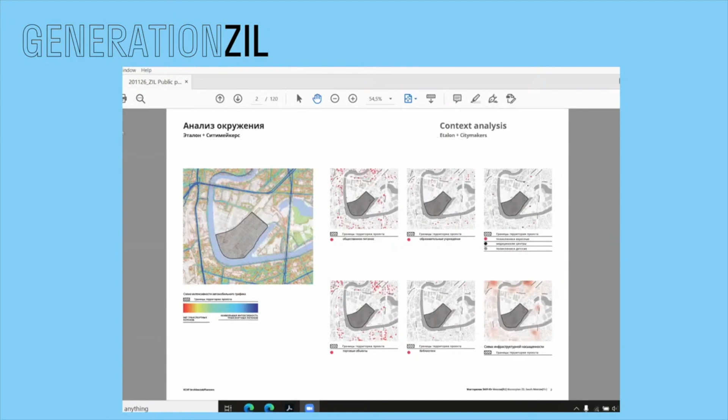Jana, may I ask you to put our second slide, please? In fact, the work we're going to talk about is the work of a developer.

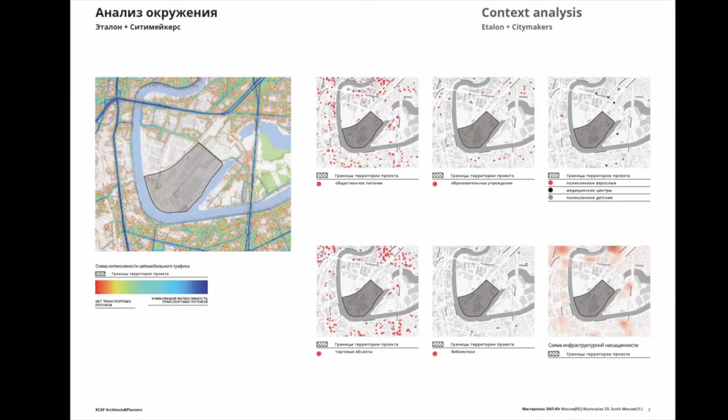Today I'm wearing two hats, not as a council member, but as a member of this large and diverse team. Before giving the floor to the colleagues from KCAP, I want to say that we paid special attention to the analysis of environment, urban planning restrictions, and the specifics of our site. We realized we need a complex approach to the environment, and that's the approach we're using currently. For us, it's really important.

We're very happy that the client is fully sharing our approach, and together with the project team, we are going to enhance it. In parallel, and sometimes even at the crossroads with each other, we continue working, analyzing not only the existing provisions but also regularly improving our vision of the site.

We're enhancing the master plan. This is the work headed by KCAP, and already now we're thinking about the landscape, social, cultural concept, the function of the ground floors, and all the matters regarding architecture and development. Above the first line of construction, we already had an architectural council, and we are taking into account transportation, logistics, and entertainment as well.

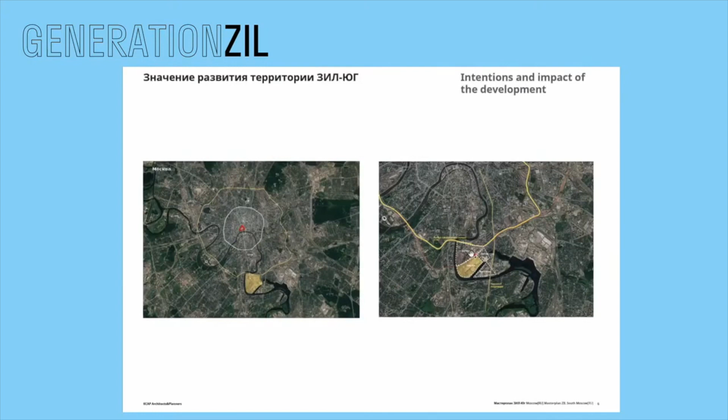For these two stages that we developed together with the colleagues, we developed a lot, and we will give you the summary of the project and the strategy of the master plan. It's wonderful that Etalon didn't just take the site and start building, but they saw the huge potential of this site, so they decided to interpret and improve it with experts.

This will be a house for 25,000 future inhabitants.

For ZIL South, first of all, we needed to improve the flexible spatial structure framework to integrate it into the city fiber, and within the framework of this city fiber, we develop concepts that will help every site.

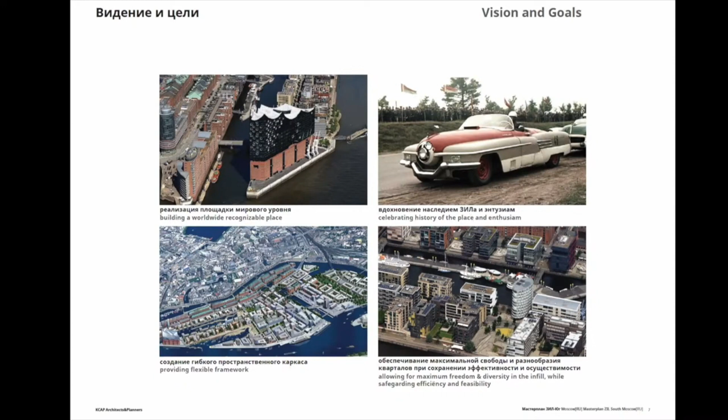At the same time, we want to create a dynamic, innovative neighborhood. We suggest a safe and convenient design that is human-centric, that promotes human connections. We want to create an active, 24/7 neighborhood that will give a threshold for further growth and improvement of quality of the surrounding territories.

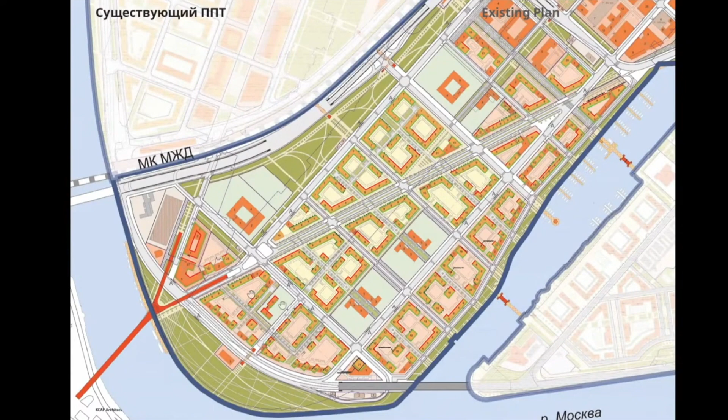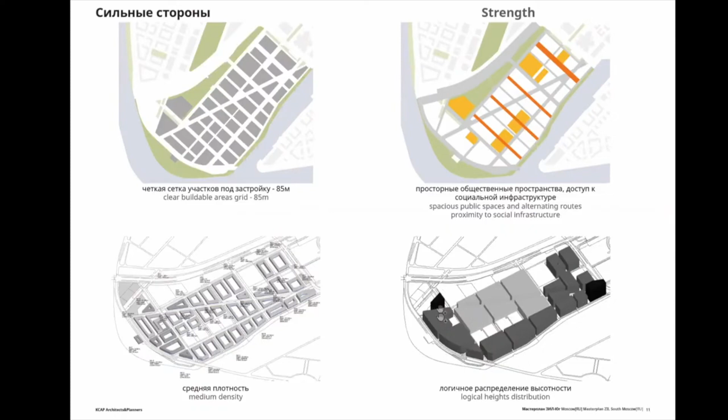A few years ago, the suggestions on the territorial planning were presented. They laid the foundations for our master plan. We analyzed this document and found the strengths: 85 meters, social infrastructure, average density in the neighborhood, and also the density increasing closer to the riverbank and metro station.

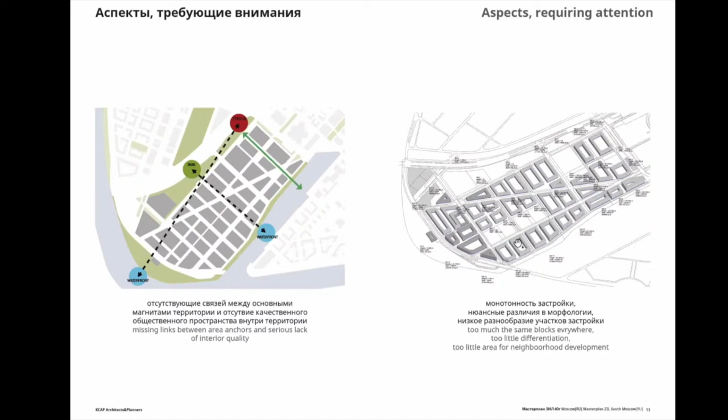There are weaknesses too: connections with the surrounding area mainly via tunnels and no on-ground passages, traffic-heavy roads adjacent to the site, absence of magnetic areas in the territory, and the absence of quality space within the territory. The territory was monotonous and lacked big cultural functional magnets.

To enrich the city fiber and make this project strong, we suggest two interventions. First, to make a central park. It will not only connect ZIL to the embankment in the eastern part and connect it to the metro, it will create a special space inside the urban structure.

Second is a pedestrian boulevard. It will connect ZIL metro station and ZIL East on the riverbank. This boulevard will become an attractive route surrounded by a series of small squares, creating a friendly pedestrian axis that connects the entire social infrastructure.

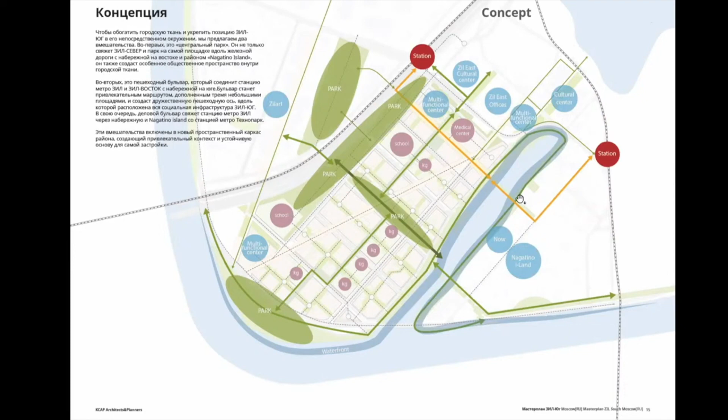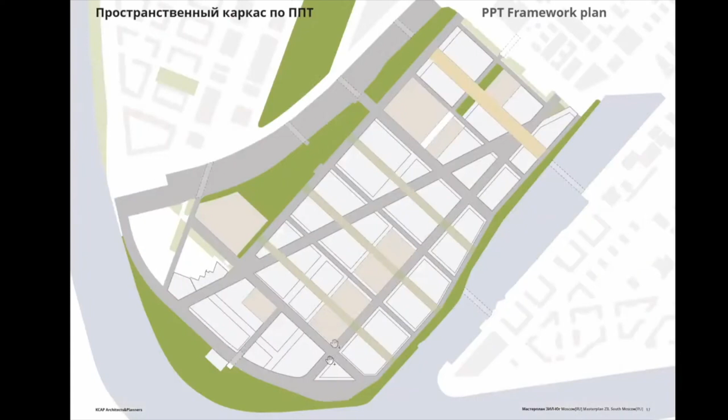In turn, it will connect the two metro stations on the riverbank with the ZIL metro station. In this way, it will become a city of short distances, where within a 15-minute walk, each inhabitant will be able to go from their doorstep to important social places. On this scheme, you can see the existing document, the PPT framework plan, and our master plan. This is the working version of the master plan.

This creates an attractive context and a robust basis for the development itself. Since we have no other spaces apart from the PPT framework, all the developments are taking place within this space, and the public spaces are there too.

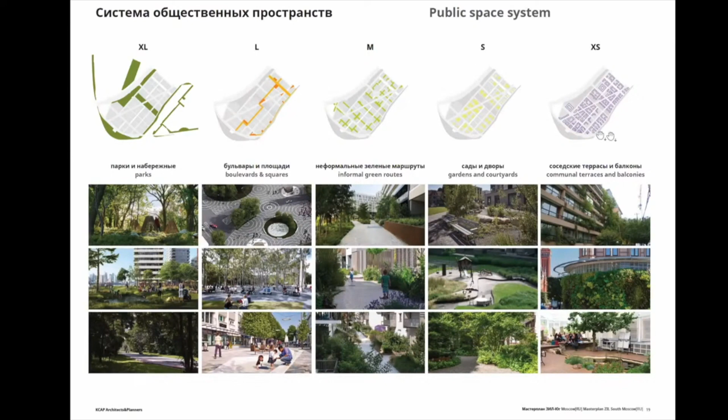The hierarchy of public spaces is solved by scale: parks and embankments, boulevards and squares, and XS, which is already the terraces and balconies. So the scale is going downsized.

You can see here the central pedestrian boulevard, around which we have the central square of the neighborhood and two community plazas, also the business boulevard with a business square over here.

It will welcome everybody coming by metro, and also the Embankment Boulevard, which connects with the first square of the neighborhood and a series of small pockets along the riverbank.

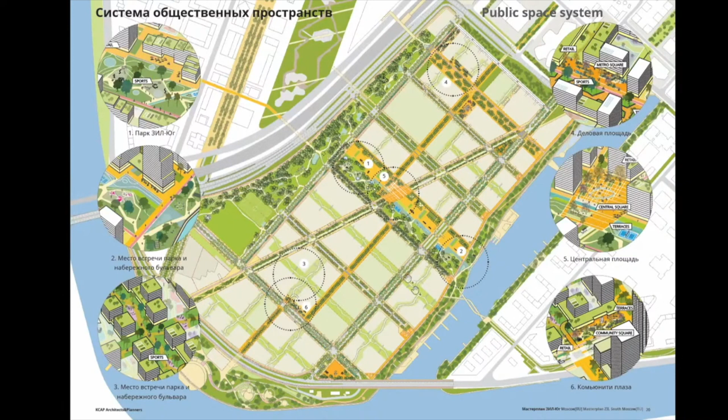We also suggest a series of open itineraries inside of the district, penetrating through all parts of the region, connecting them into one.

As mentioned before, this harsh infrastructure around is cutting off this district from the rest of the city. That's why it's really important to build additional ties with the city.

The overhead bridges across the river, pedestrian underground passages, and on-ground passages.

What matters here is also the social characteristics of the future neighborhood. Who is going to live there? Which functions are they going to use? We develop 3 daily scenarios depending on the users.

Local population, tourists and workers living in the territory, and workers living outside the territory. We also took into consideration the content of the ground floors, and looked at the features of schools and kindergartens of the 21st century.

They need to involve new methods of teaching and education to be attractive for children. Secondly, we have large sites for educational and enlightening functions. So we suggest the social infrastructure have dual use.

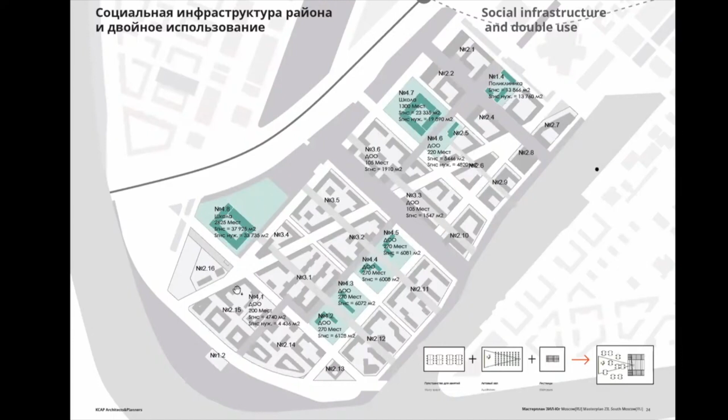We have a lectorium, exhibition spaces, stadiums, and children's playgrounds that should become part of the well-being of all the residents. They should be available during evenings, daily, and during the weekends, etc.

We also revised the road network and tried to make it multimodal, to make sure that every person is comfortable while moving around. ZIL South is about architecture for humans.

We promote public transport here, and we have separate lanes for buses. In the diagonal boulevard, we fully exclude vehicles and allocate it for public transport only. This makes the boulevard really friendly for pedestrians.

We also suggest changing the trajectory of some roads to take away part of the traffic from the diagonals, to make the traffic near the school junction as safe as possible.

At the place of hop on, hop off for the school children, we create a safe space for comfortable parking and children going on and off the buses. The vehicle traffic is not there at all.

It's pedestrian, connecting this road to the riverbank. We also have a network of bicycle routes throughout the territory.

It connects with the main road along the embankment in 3 places: 1, 2, 3. It connects with Likhachov Avenue here, with ZIL Vostok under this highway, with a new parallel Moscow Railroad here, and with ZIL Art side diagonally.

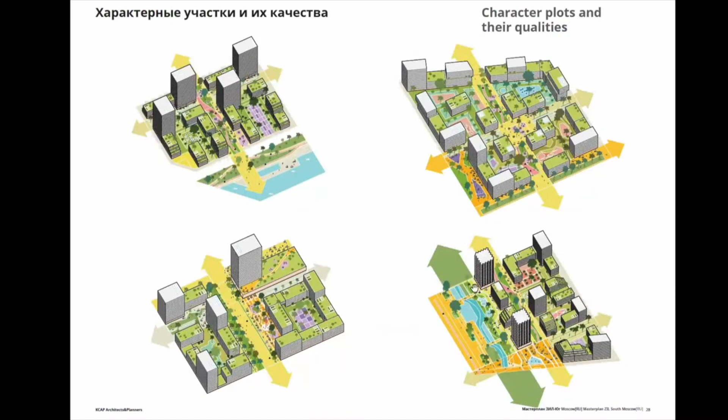The urban construction principles and atmosphere of each quarter will be directly tied with the functional magnet it is attached to. Living near water, in the garden, in the business quarter, or by the park will also be a brand new proposal on the retail market in Moscow.

Here you can see what the quarters look like. In the river quarters, the typology and space of the buildings is as open as possible and connected to the river. Urban gardens have a specific interior with urban villas and greenery.

In park quarters, they have a very wonderful, beautiful position, with highlights to maximize ties with the business quarter there. The business quarter is a more traditional perimetric quarter with more focuses, functionally saturated, and located near the metro station.

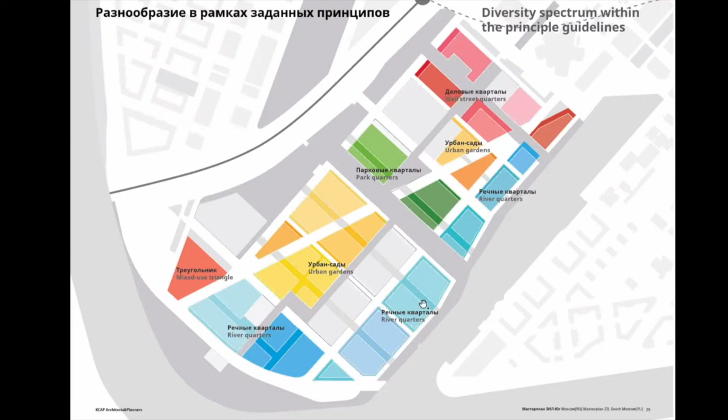To strengthen the spatial carcass, the structure, and to stick to the concept from the very start, we develop a number of guidelines and principles for the development and public spaces. In this way, each site can become unique and yet remain within the framework of our principles.

Here you can see how the above-mentioned aspects find their place and role in this district, turning it into a happy city.

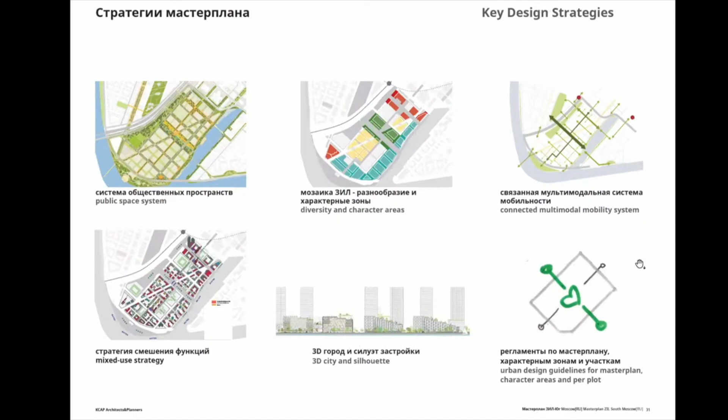I'd like to conclude and say that we are working within our master plan over public space systems, diversity and character areas, connected multimodal mobility system, mixed-use strategy, 3D city, and then we develop the regulation. I'll later dwell upon each strategy separately.

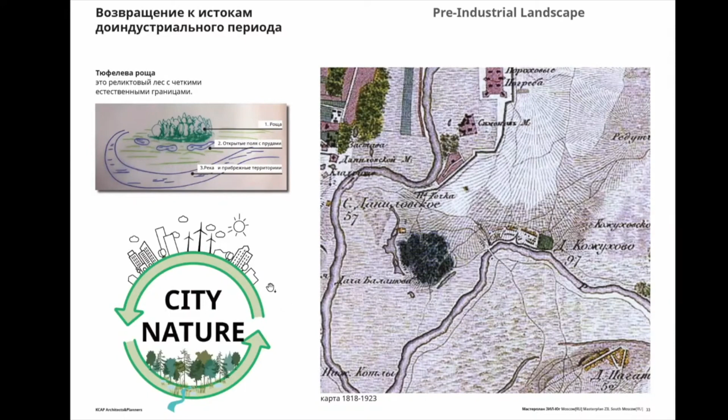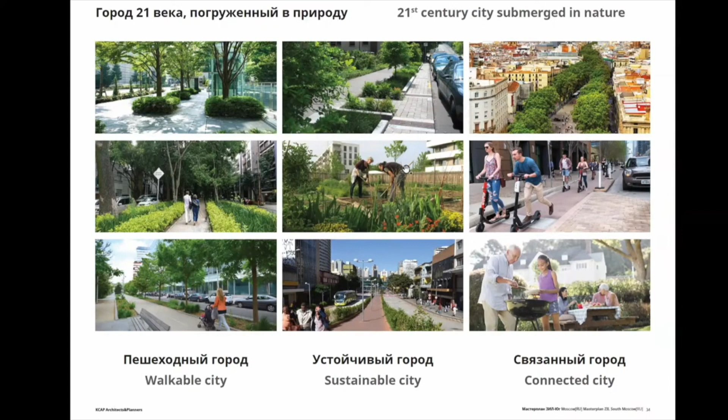We transform it into a city of the 21st century. It is infused with urban culture. In this neighborhood, we will have modern people living who take care of their health. In ZIL South, a sporty lifestyle is promoted. The priority is given to pedestrians, cyclists, and public bus users. It's a sustainable district with a functional landscape. It promotes educational and social programs as aspects of social well-being.

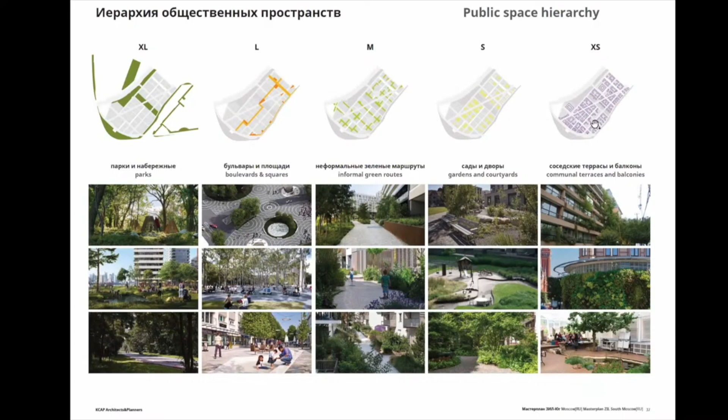As has been mentioned before, the framework concept of the master plan involves 5 scales: XL, parks and embankments; L, boulevard and squares; M, green routes; S, gardens and yards; and XS, terraces and balconies.

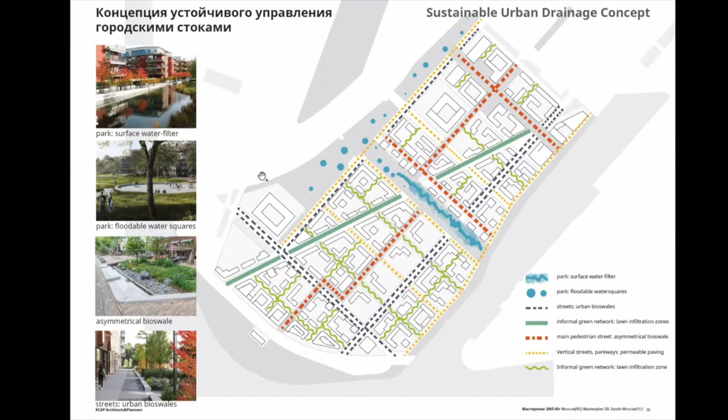We believe that the landscape should be functional and reflect attractive design. We deploy a bio-drainage system in all our public spaces - technologies for retaining and treating rainwater, including floodable ponds and sites, and mini drainage. We plant trees to protect the environment and minimize negative environmental impact. We integrate trees to make our environment humanistic. We minimize plastic to make it sustainable.

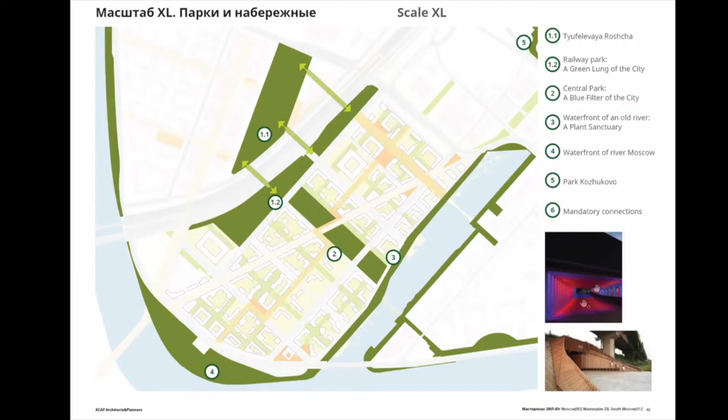Let me tell you briefly about each scale. Parks and embankments - parks have their own ideas and design. The central and northern parks are united, and it's important that they tie with a Tyufeleva grove, or Tyufelevaya Roshcha. It's interesting to see how one park is transcendent with another, and going from one park to another is another adventure.

The parks are active throughout the entire year, with place and role for quiet leisure sports. In wintertime, our ponds become ice skating rinks, and the hills become sleighing slopes or ski slopes. So we have Roshcha, fields and ponds, and water nature at the riverbank. Roshcha is as natural as possible, with a real forest to protect the neighborhood from noise coming from the railroad and the new highway. It has hills of different heights.

The Central Park has 2 areas: the sunny one inside the urban area, and the natural zone of the park connecting with the urban tissue.

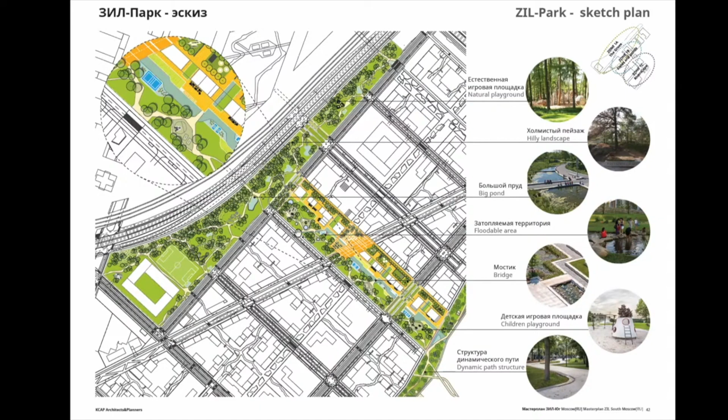The hilly areas have more greenery. The pedestrian paths are wider. In some places, the greenery covers asphalt completely. The main route is in the central park, and it contains secondary routes and neighborhood greenery.

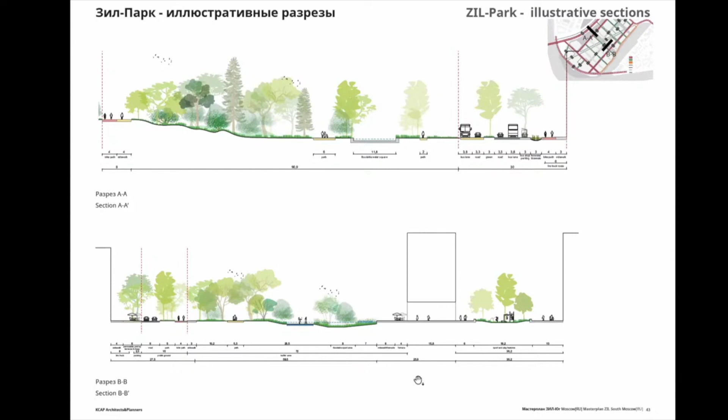We can also see here how our main route and the park concept are integrated in the embankment. The borders are almost seamless - one park is transforming into another.

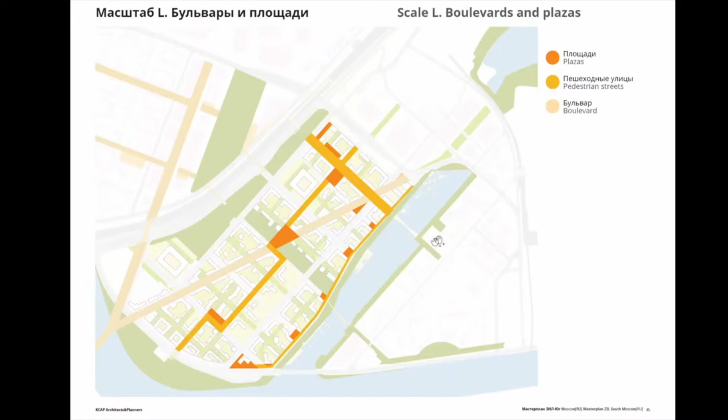The second scale, L, is about pedestrian boulevards - a pedestrian boulevard in the central part of the neighborhood, and the business boulevard from the embankment of the river. The design is associated with the typical area the boulevard is located in.

The central square is the pulsing heart of the neighborhood, where all the junctions meet together - the parks, the diagonal boulevards, etc. The size of the square enables different open space events to be conducted there - markets, lectures, fairs, exhibitions, etc.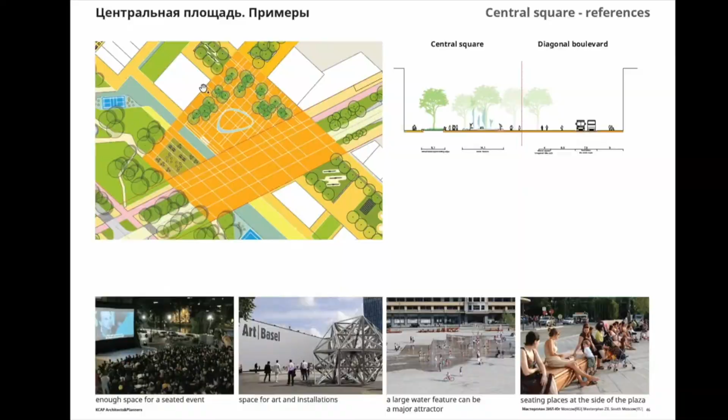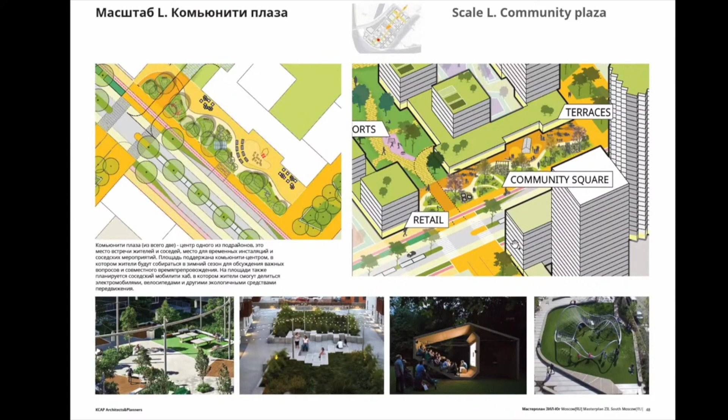So we talked about the squares, the first central square. We also propose to organize a community plaza on the way of the pedestrian boulevard. The squares will be functionally supported by community centers, with bike and scooter rental, electric vehicle rental, etc. They are located between the first and second line of construction development.

The second area is located closer to the business boulevard. The business square is where metro passengers will come, with functional diversity of the buildings around.

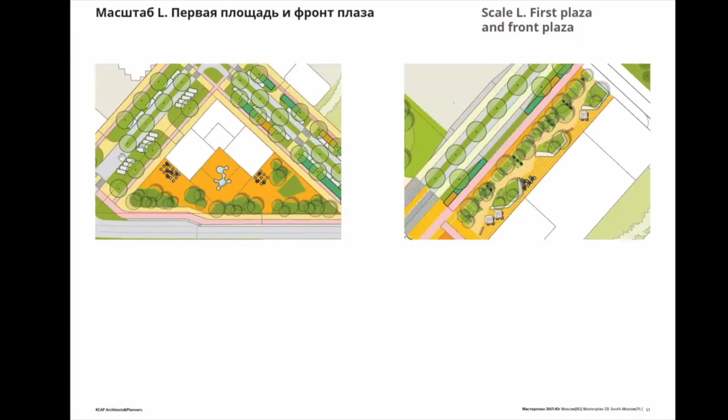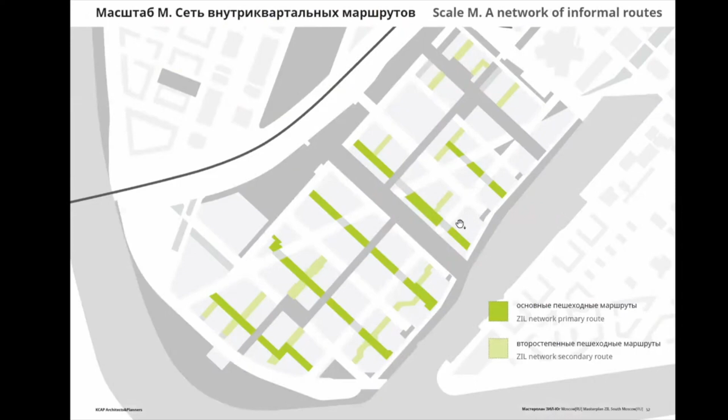Apart from the above mentioned squares, we have one more square - the first square of the neighborhood, near the first line of development, and the frontal business square near the metro station. The project also envisages a network of pedestrian alternative routes, supported by active functions, which will connect all the sites of the ZIL neighborhood and create a kind neighborhood atmosphere, not only within the yards, but also in the district in general.

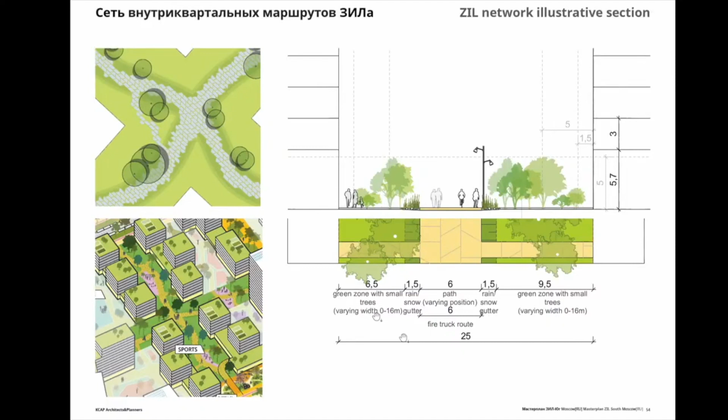The recognizable uniform pavement and mini drainage are the main principles of these routes. We also developed the guidelines for the yards.

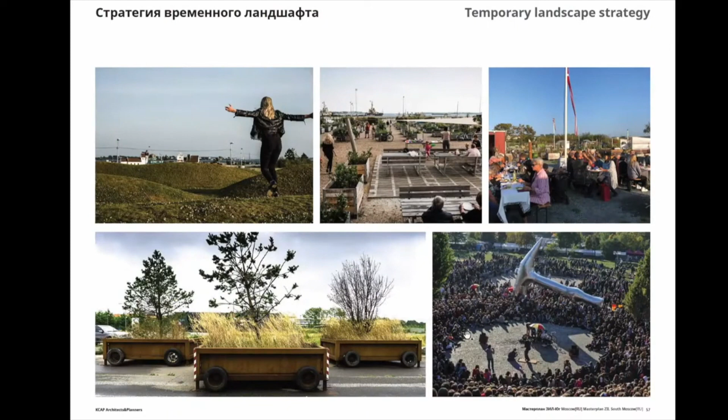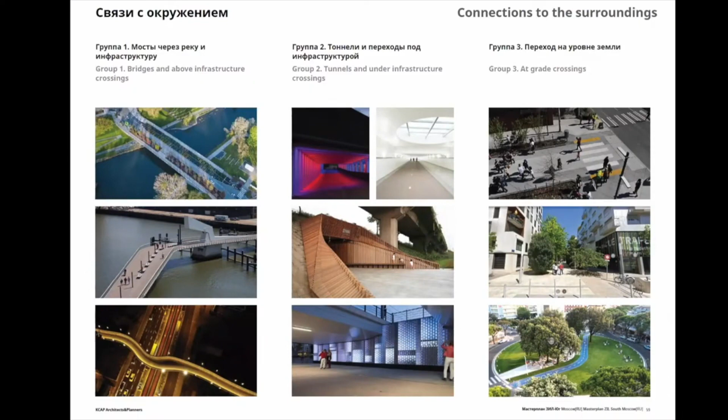We think about the strategy of a temporary landscape tied with the rows of construction. It will help us build temporary facilities and gradually develop the entire neighborhood and landscape. We keep in mind the environment and care about quality, so we make suggestions about safe pedestrian underground passages, bridges, etc.

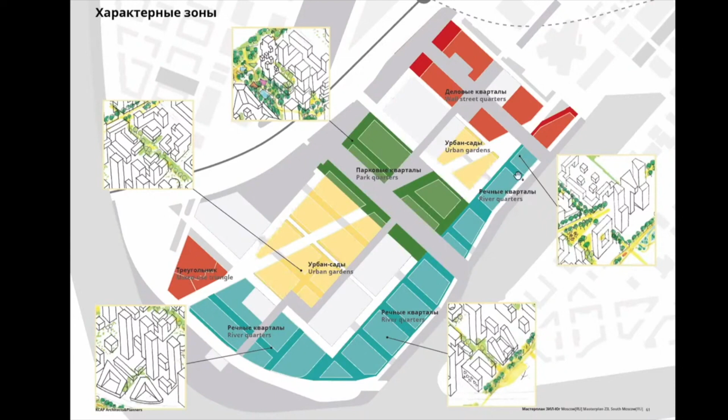Let me tell you about the mosaic: four typical areas - river quarters, urban, park quarters, and business quarters. Each of them conforms to a particular set of urban construction principles, landscape, and typology.

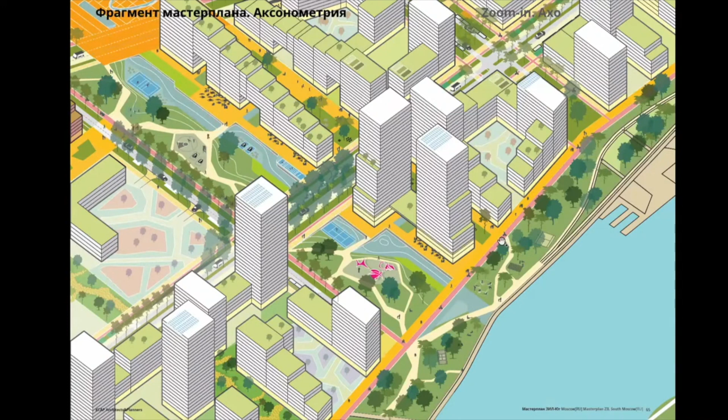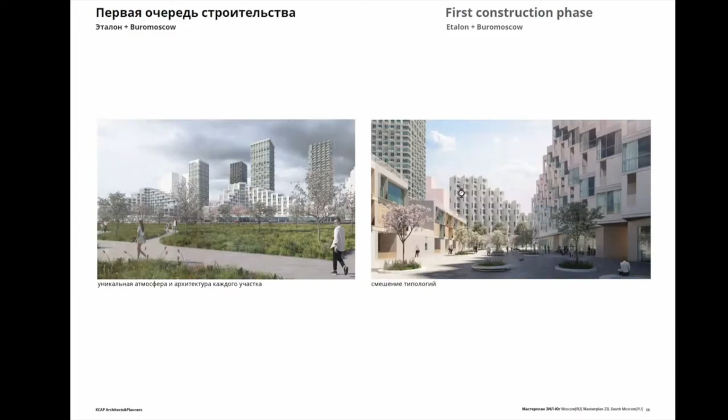What is the river quarter about? Use of the river, mid-story buildings, high dominance on the second line, maximization of view, refurbishment, separation of private and public spaces of the yards by visual barriers and heights. The construction complies with all the principles and becomes a pioneer in discovering the entire potential of the territory.

Here's the bridge developed by Etalon. In the river quarters, we will deploy new progressive construction technologies. Wooden panels and sections will make this area even more attractive.

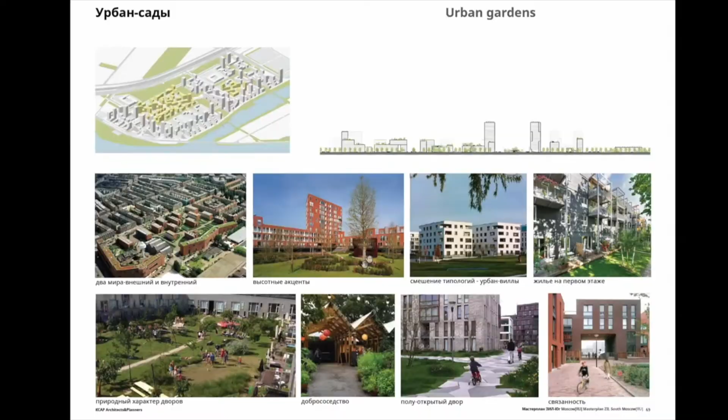What do we mean by privacy and protected neighborhoods? It's urban gardens, a place for urban farming, greenery and plants for these low-rise buildings. It's a humane scale of the environment.

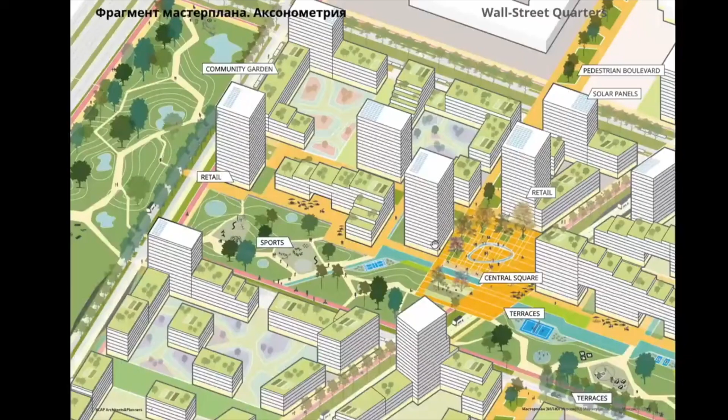Life by the park: it's when you have a park instead of a yard, when you live in a unique architectural building that is the business card, the window of the entire neighborhood, when we maximize the range of various technologies here and the richness of the environment.

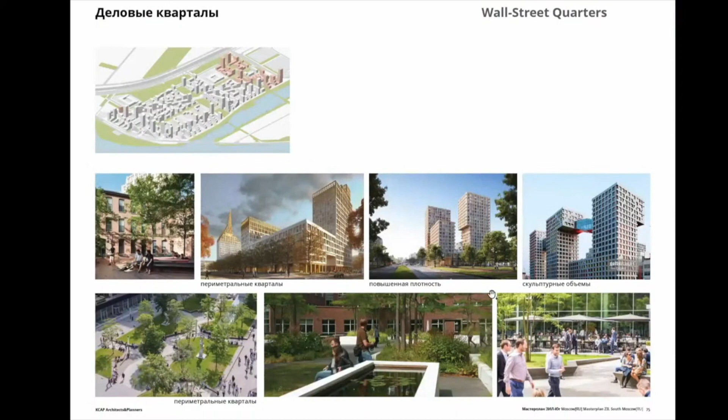As for living in the urban quarter, it's about proximity to a metro station, active and functional environment, enclosed and semi-enclosed traditional quarters with high-rise access, and strict landscape design.

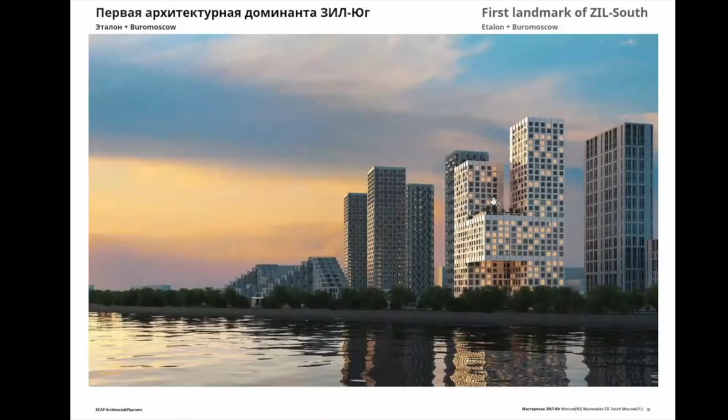We mentioned the places for landscape architectural dominance where the design should be beyond imagination. It's an invitation for the architects to leave their trace in ZIL South. These facilities, these buildings, will be iconic and will be remembered by all the visitors and inhabitants.

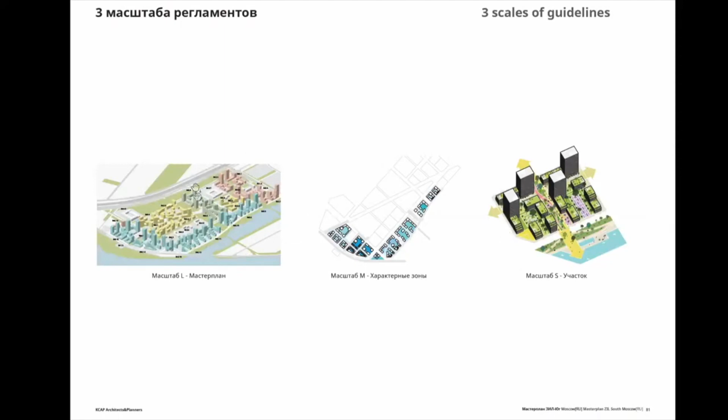We developed urban three scales of principal guidelines. Here are the examples of principal guidelines.

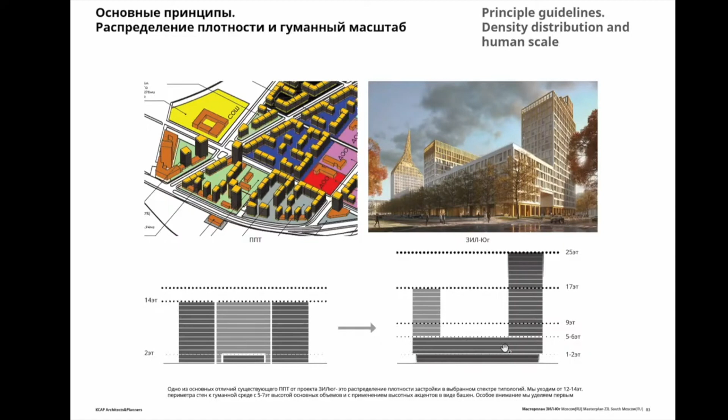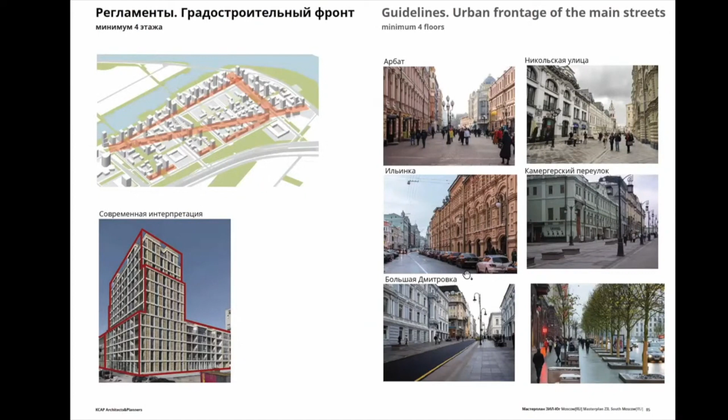A spread of density, distribution, and human scale. We allocate different high-rise accents, different heights, recognizable heights, and also the uniform silhouette of the development - an urban background from 3 to 8 stories. It's a well-known principle that can be observed on the best historical streets of Moscow and Europe.

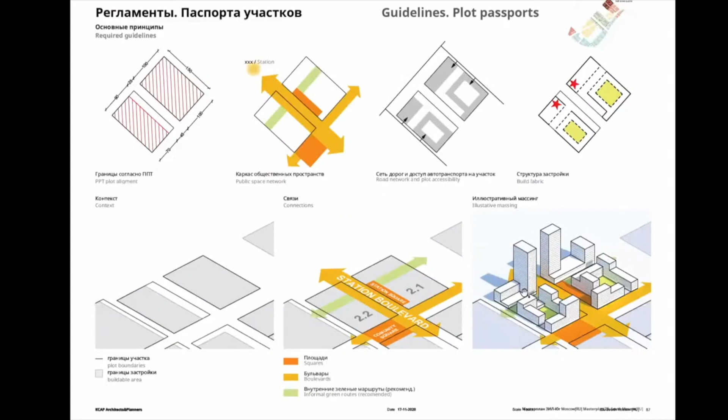For each typical zone, we develop its principal guidelines. For every site, we have a certificate with the main principles, and they will work as the terms of reference given to each architect of each site.

At first sight, it may seem that it's only housing in this neighborhood, but in fact, according to our PPT framework, we're activating almost all the ground floor facilities, outlining a truly active environment 24/7.

The most active areas are embankments, parks, and boulevards full of retail and cafes, community plazas with community centers and other supportive functions. Supermarkets, services, offices, and co-workings are concentrated along the public transport routes.

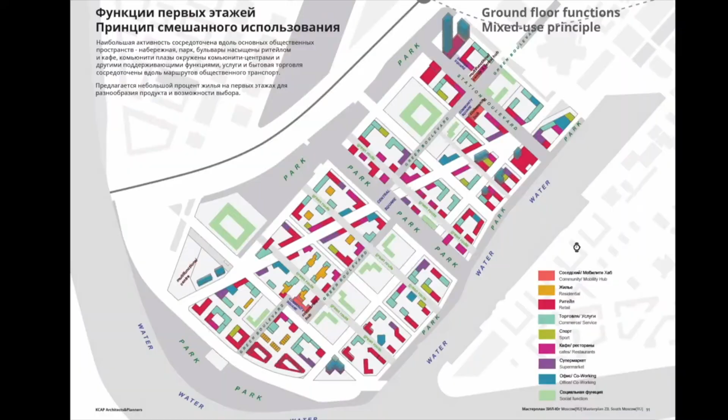We have a new typology in the especially dense neighborhood, with a small percentage of housing on the ground floors as well, for the diversity of choice.

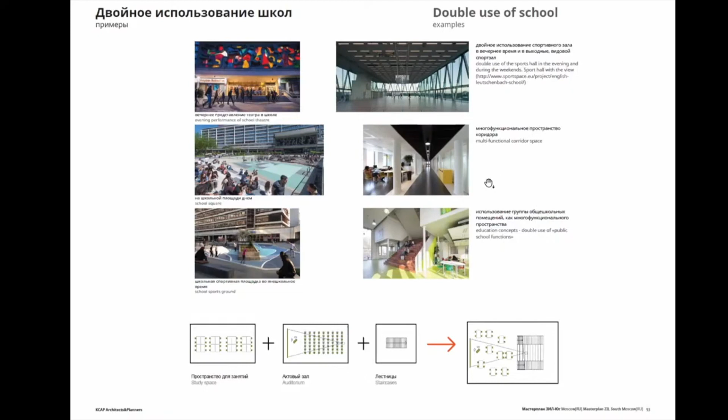As it was said, we didn't mark places for large cultural facilities, so we suggest a double use of schools: exhibition spaces and lectoriums should be part of the school and available for residents in the evening and night time.

The last important chapter of the master plan is the multimodal mobility system. We promote a human-oriented design. ZIL South is a small city of short distances, where within a 15-minute walk we cover the whole range of people's needs.

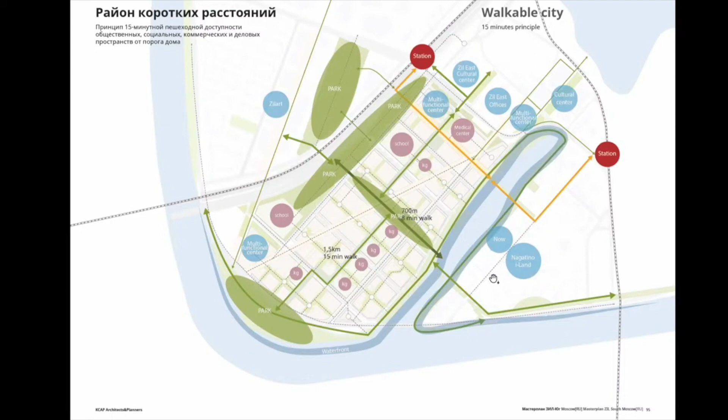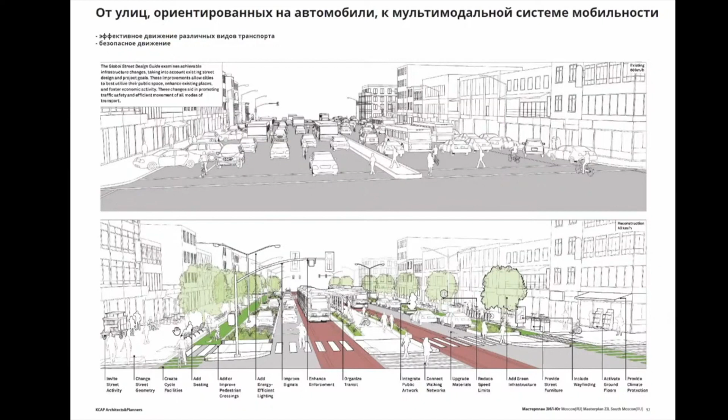It's a healthy quarter with streets full of trees, minimum traffic, and minimum CO2 emissions. The traditional set - vehicle, metro, bus, and pedestrian - is expanded to set new priorities. Number one is human, and all other members of traffic are ensured comfortable, barrier-free movement. Each has their own area: pedestrians, cyclists, public transport, cars, flexible greenery and parking.

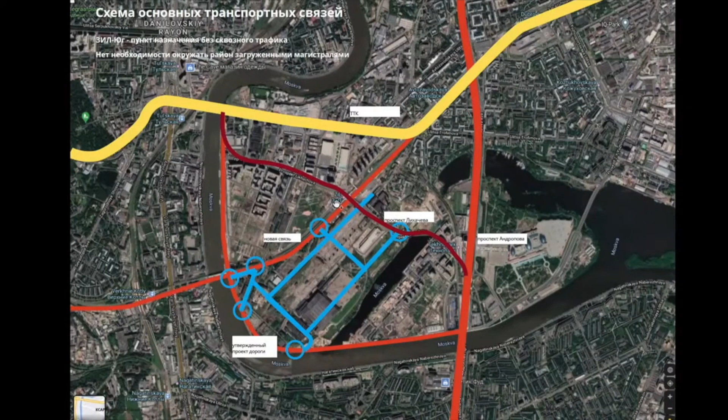Another thing we need to consider is the new railroad that will cut off the ZIL South from the ZIL Art neighborhood even more. You can see the main roads in dark red, and all the other local roads are in blue.

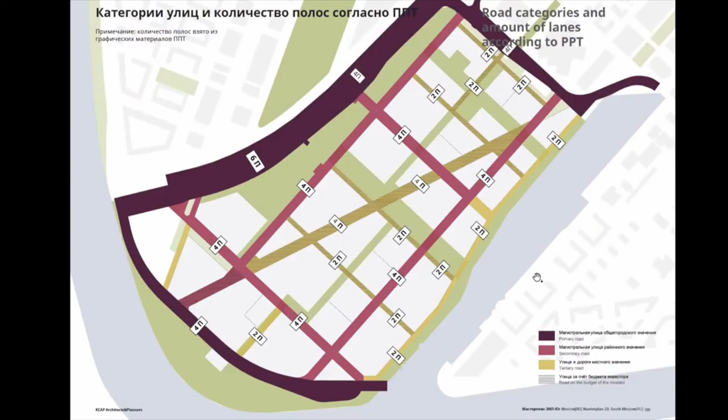With our suggestions on improvement of the road network, we are not deteriorating any requirements. We are keeping the lanes for public transport, diagonal lines for vehicles and public transport, vertical ones for vehicles, and we take away the main vehicle traffic to the sides diagonally to organize a safe, complicated junction, crossroad with different passages.

We developed additional ties with the urban infrastructure. The territory connects with the highway from the embankment in three places: here, without a crossroad; closer to the center, with a crossroad; and under the bridge, a new main road. We also connect with Likhachev Prospect through this crossroad, and this is MKZD, which we connect to centrally.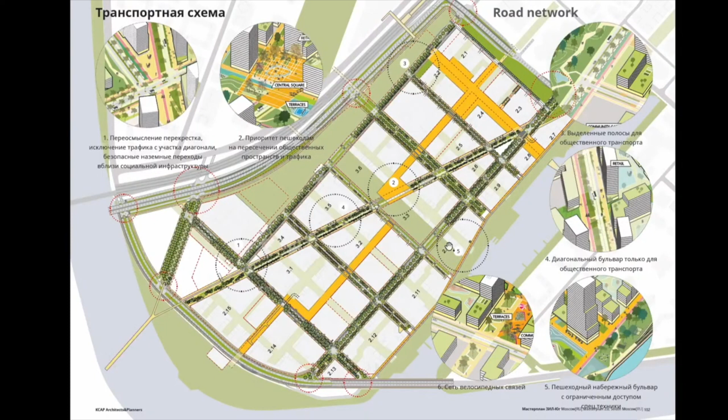Our transport scheme will be modeled and calculated. It contains flexible input, so in the event of problems during operation, we can always adjust it to different conditions.

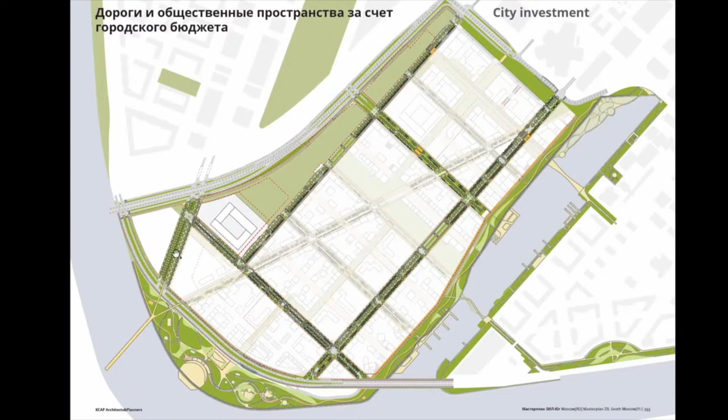I'd like you to pay special attention to the road infrastructure, which will be funded by city investment. It's very important to synchronize the road construction with the development plan.

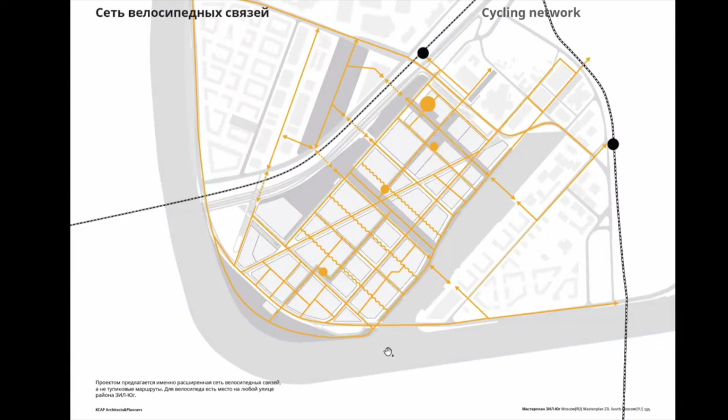On this layout, you see the public transport routes, and here you can see the suggested cycling network. The project envisages a cycling network, not just the dead-end routes, with three possible scenarios of daily and weekend routes depending on the users.

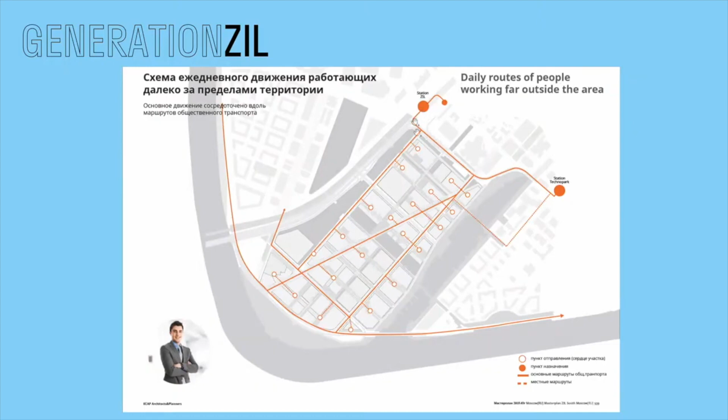The local population, families with children, will use the recreational structure and district routes daily. Tourists will come here during weekends. Business people who come here for work will use the functions here. Those who work beyond the territory will choose the shorter distance to the nearest bus stop or metro.

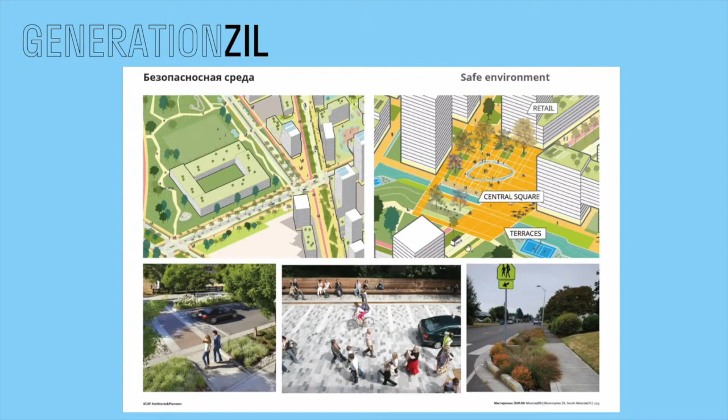We also think about safe environment: uncrowded crossroads, smart traffic lights, safe areas near schools and kindergartens, safe passages near the central square and junctions, and also barriers to reduce the speed of vehicles.

The nature of the streets ties with the functional magnets they are adjacent to. Thus we have city highways, park streets, park alleys, pedestrian roads, and neighborhood streets. We'll show you a few profiles of our roads.

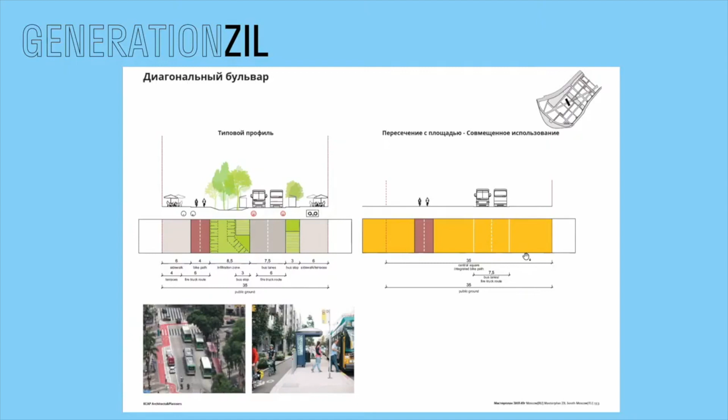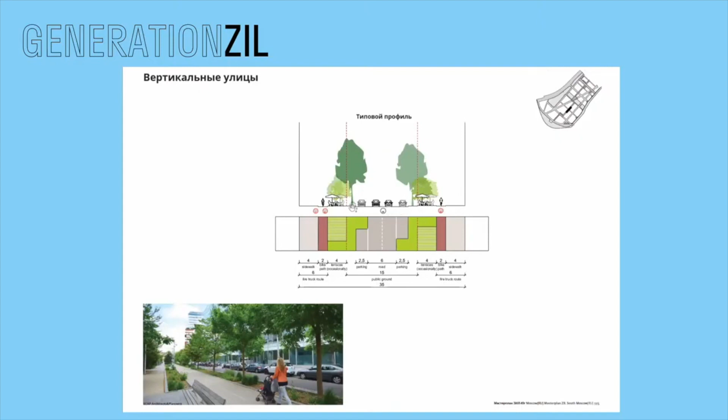As the buses drive closer to the urban connections, we can see the pavement there. This is the boulevard along the Central Park, with grown-up trees, greenery, and functional vertical streets with maximum parkings.

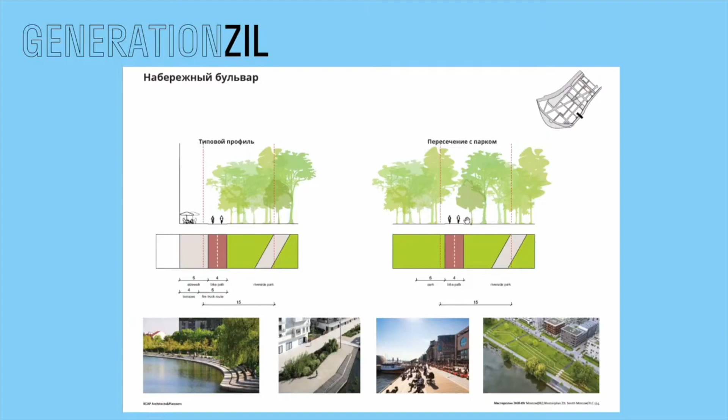From these streets, we drive into most parts of the site, the Embankment Boulevard. No vehicle transport makes the riverbank space friendly for cyclists and pedestrians, bringing the river closer to the yards and the buildings. At the junction between the embankment and the park, we see both parks merging together. All the profiles were developed considering the organization and rules of special machinery accessibility.

The online platform Generation ZIL is an important aspect to support our project. From the very beginning, Etalon and City Makers organized the Generation ZIL platform. It hosts different events like the discussion today, where experts discuss the new potential of the city. We involve future inhabitants through workshops with stakeholders, and giving a position to raise opinions for any participant is a distinctive feature of our project.

We presented the working version of the master plan to you today. This is the result of maximum coordination with all stakeholders. In the future, we'll soon be developing the final version of the master plan, and now we are open to your comments. I'd like to say in the end that we wish we would get support from the city on the following things.

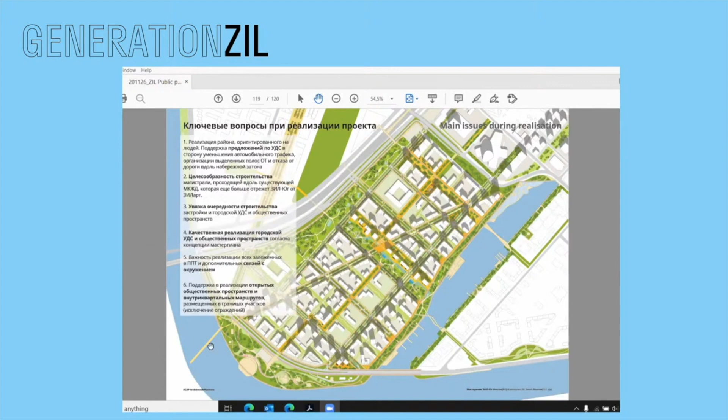Yes, let me show you the plan again. You're talking about this exit, yes? In fact, unfortunately, we have only 2 ties with the Mark Chagall embankment.

So we have only 2 ties with Mark Chagall embankment. This is an underground passage for pedestrians here, and the second one is under this highway, a continuation of the Zaton embankment to Mark Chagall embankment. In our proposal we tried to link to this junction because this is the only possible connection. It was also possible to walk directly from here to here and turn here, but to simply go straight all the way to the embankment wasn't possible, because we have this mandatory junction.

In fact, it's a pity that this whole highway is so busy and so final that it chops us almost completely off the embankment. But with this route, with this itinerary, we'll try to direct people to this place, and the quality of this underground passage should of course be enhanced.

Thank you, Yana. Yuri, let me say a few words about this highway. Can you bring back the master plan, please? I asked Maxim Kondebaila to connect, and Vitaly Lutz should be here as well.

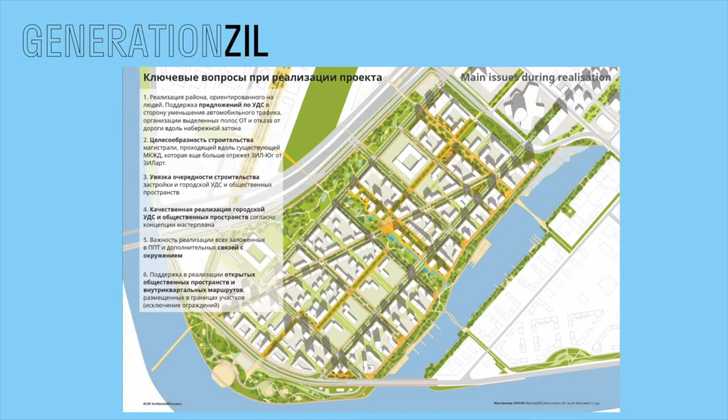This embankment used to be, in the past, part of the urban planning project, and was supposed to be one of the main city highways. But we approved the plan and took away the main part of the traffic deeper into the island. After the third ring, it turns to Simonovskaya embankment and goes further to the right - you cannot see it on this map. So yes, indeed, we have this highway for vehicles.

We need to work with the profile to make it a normal embankment, but vehicles driving along the embankment is something normal - there are many examples, like Croisette, Promenade des Anglais in Nice, and Copacabana. So please try to take it easy. It's not that this highway chops it off, but we need to enhance the profile of this road and make it into a quiet boulevard with slow traffic, comfortable traffic lights, and comfortable pedestrian passages. I want to say this is not a highway - it's not a high-speed highway, not at all.

Sergey, may I say something? We have a question from our audience about the future of the pedestrian bridge - there was a pedestrian bridge on this diagonal, ZIL South, ZIL Art. Regarding this bridge, so far there are no plans to build it. What I mean is the city is not planning to build this bridge because of expenditures, etc.

But nothing prevents us from preparing the papers for urban construction. If an investor expresses an initiative to build a bridge - and we have examples of investors investing in bridges - let's consider these scenarios. Building it technically is possible. We just need to find a way to implement the project.

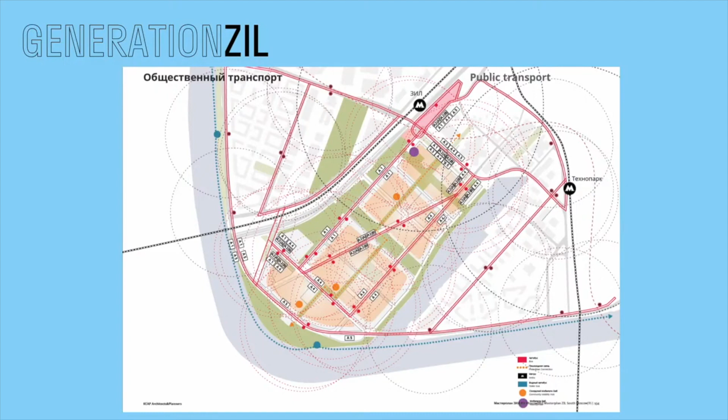Second question: there was a comment during the discussion, and you mentioned that vehicles drive straight into the underground parking, but we also have taxis, and we have situations when a young mom with small kids with a lot of products from the supermarket takes a taxi and drives to the entrance of her apartment. These situations should be considered as well by the developers, please try to work on these kinds of scenarios, because they will be increasing. Car sharing, we kind of don't know if it's public transport or something in between.

The third question is to you, Peter. Have you analyzed the already constructed ZIL Art project, because it's a similar project done by the same people? Have you ever done a survey about what the residents of this neighborhood think about their project? What does the city think about it, and what about other Muscovites? What do they think about this project? Have you analyzed the opinions, trying to mitigate the negativism of the ZIL Art project in the future project? These are my main questions.

One short question: I didn't see any entry into the island from the big roads. I think you could make more. I know experts know it better, but these are my questions.

Let's start from the first questions. Jana, please. This is connected with ZIL Art, Maxim, you should take this question, because indeed we discussed this a lot. Jana, please.

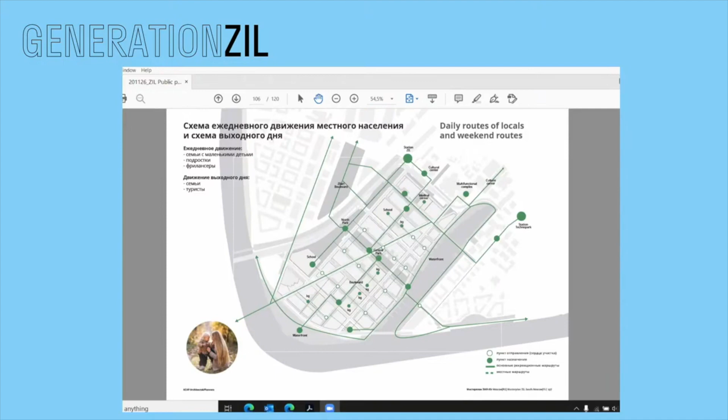I thought that we elaborated on this aspect in quite detail. Inside all these sites, we have open routes with no fences, no bars, and we have a lot of variants for how to pass through, not only diagonally, but also from every side. You can walk internally, you can take the pedestrian boulevard, any route to get to the metro or to the bus or public transport stops. The shortest way between two dots is the straight line, and experience shows that zigzags are not the most optimal way of getting as quickly as possible to the metro.

Why haven't you done it? Maybe it was somewhere in the PPT. It's a question related to the PPT, I guess. When we got the PPT, we have the PPT framework that we are not allowed to change. We have the red lines of the roads, and we have the border lines of the sites. This diagonal is the dominant part of it. If we don't do this bridge, then we don't really understand why the diagonal is there. But we try to integrate new ties into the master plan to mend the only connection of the neighborhood and to add alternative movement routes for the residents.

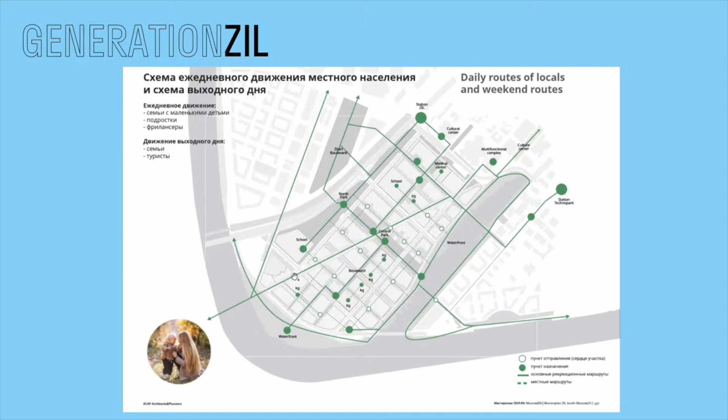Of course, the diagonal was in the PPT framework. Unfortunately, it cannot be corrected now. Let me say a few words about the diagonal, my friends.

I know that every next architect always knows better how it was better to do the project than the previous architect. I am really understanding and open about these things. And when people say that, well, it was here before and we can't change it — you know, the master plan of ZIL is something we have been seriously doing since 2012.

And this territory was planned together with a well-known architect, you probably know him, Yuri Grigorian. You probably know him too. And so, together with him, we were creating this whole planning logic.

Whatever you have with the embankment and movement inwards, we not only have one diagonal but two diagonals going to the bridge on the embankment. Nobody cancelled the bridge, by the way. It may still be built.

So these two diagonals were brought together on this peninsula, and it was planned to do a boulevard here. The metro, by the way, was not in the plan back then. The metro station appeared later when the entire planning was approved. But the MKZhD, the Moscow Railroad Circular Road, was there.